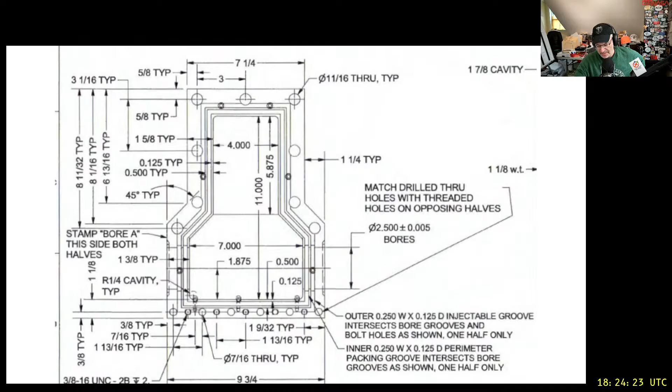Yeah, Bill only says, good thing I already took the Excedrin. Yeah, it's true. Evil says, professional engineer, not a professional draftsperson. Okay, so in the old days, I could say that now. In the old days, you did have drafts people, and you did have people whose job it was to make the drawings, and you had engineers whose job it was to make the designs, and they were not the same people. But what's happening now is that they tend to be the same people, and the industry wants them to be the same people because it costs less, they think.

So with our electronic tools now, you go in, think about Fusion, right? Let me show you some other examples before we jump into the argument about Fusion, which I think is a good one. The same thing happens in electronics. I'm just going to share with you some lovely electronics drawings. We'll take a look at these here. Here's a very good schematic. I couldn't find the one I wanted to show you, but this is an example of a very good schematic.

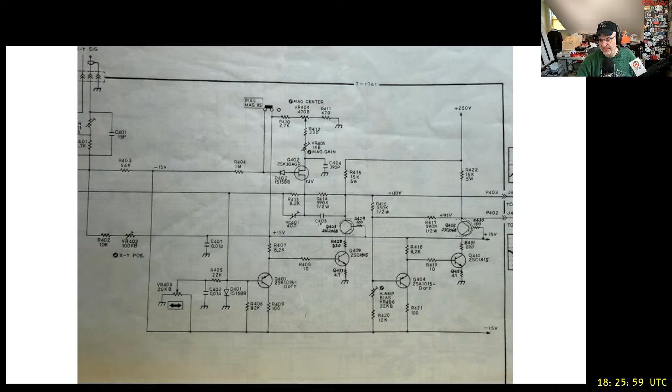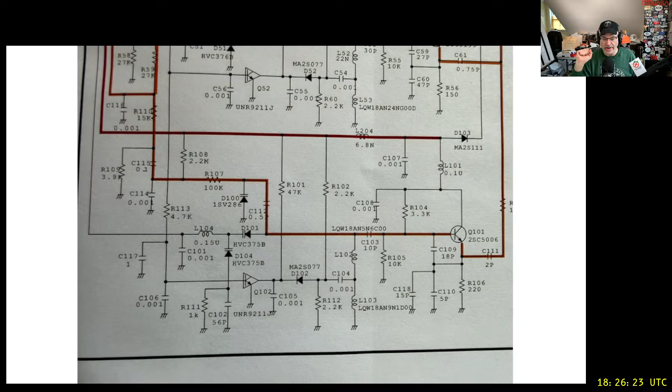It's very clean. The signal flow is left to right. Everything is done nicely. You can read and understand this schematic easily, almost trivially. There's a big view of the same. Here's another schematic. This came out of an ICOM radio. Again, note the use of color to show certain signal paths. Very clean ground symbols, so there's not excess wires all over the place. Very nice. So there are ways to do good schematics.

Here's another one. This is actually a big shot of part of the ICOM schematic, and it's very clean and it's easy to read, and you can follow the signal flow. I can tell you that the schematic that Mike showed me was not. So I started working on a drawing, and let's see if I could show you this drawing. Yeah, here it is. It's nothing crazy. It's the fill adapter that I've been working on. This is a work in progress. This is not finished. And this is page 1 of that drawing. Okay.

Mr. Tim Beatty says schematics are a directed acyclic graph. You're welcome. Thank you. I don't know if you know this, but Carl Tauber and I played bass for Directed Acyclic Graph back in, was it 79, Carl? I think it was back in 79.

So typically you're going to face off the part, and that's going to be 0, and then you work your way in. So I could stand at the machine and program this, or I could stand at a machine and turn this, and I have enough information to get the job done. This isn't finished, so this isn't presented for analysis, but that's what I like to do. So I like to have a main page and then a sub page, at least for each operation.

And then sometimes you have to have detail sections where you go in and show some details. For example, on this one, there's an O-ring groove. I think I can get the job done without a detail section on the O-ring groove, but we will take a look at that when we get to it.

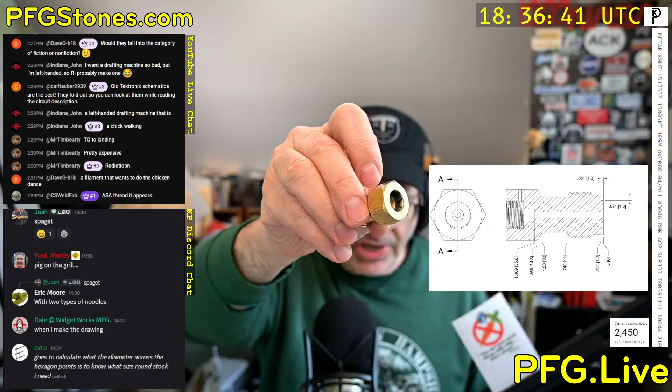CS Weldfab, you're very good, sir. He notes that there's a weird thread there. Yeah, so this part, which, by the way, here's the model for the part, right? I have one of these, and I'm reverse engineering it. Okay, full disclosure, this is a reverse engineering job, but we talked about this before, and I had to nail down the threads on this part.

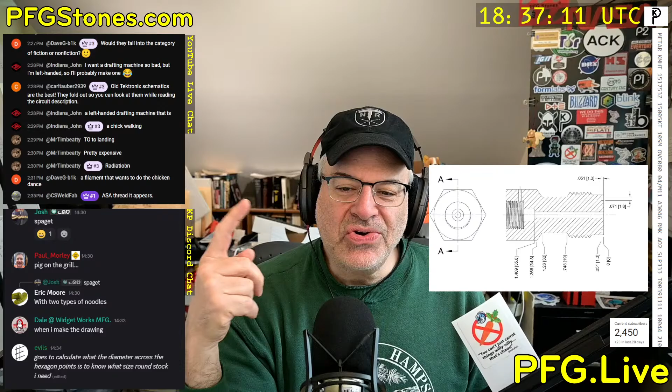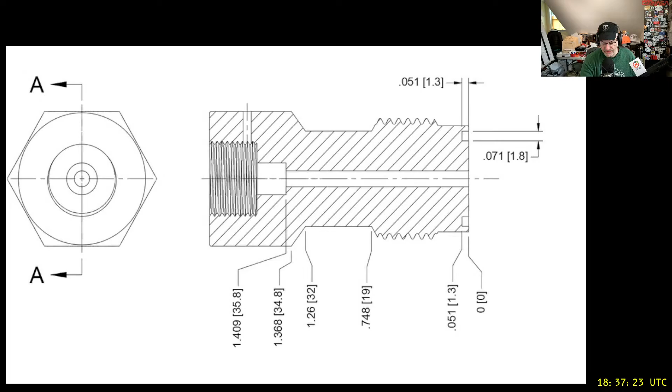So the small threads, the ID threads, turns out after a little sleuthing, was lovely M14 by 1 millimeter. So that's standard as standard comes. However, the OD threads that you see, the big fat threads, are meant to go into a scuba tank valve. And the O-ring, of course, is a seal on the face of that valve. So,

what is that thread? Well, I was hanging out on Discord while I was doing my research, and I was talking to Dale, and whoever was there. And this was not trivial at all. We were able to figure out that it was 14 threads per inch, but that's where the similarity stopped, because the outer diameter was weird. It was not obviously metric. It was not obviously imperial. And I was having a hard time figuring it out.

I think Dale guessed at a pipe thread. He said pipe thread, and I'm like, that is very possibly the path to the answer. CS Weldfab says it's a paintball standard. Yeah, I'm learning that. And this, of course, is for air pistols. And air pistols, paintball, it's all like one big happy family. Yeah, Dale says pipe sizes for the win. And it was a win.

So it's not yet on this drawing here, because I haven't finished it. But on the big drawing, I did note it, right? So here it is. G 5/8 by 14 BSPP. So from my understanding, the G is good luck. The 5/8 is 5/8 of an inch, which has nothing to do with the size of your threads. By 14 is 14 threads per inch. BSPP is British Standard Parallel Pipe. Did I get that right, Dale? So thank you very much.

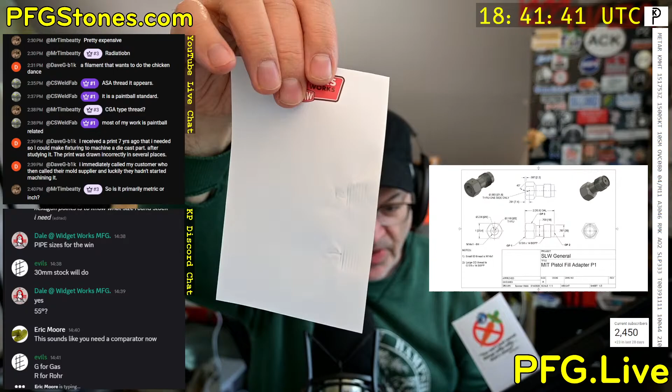Okay. Now, on the paper, you have focus. Thank you. You have the markings of the thread. And now you can count threads. You could make a little nomenclature right on the paper. And then you get out your calipers, my Mitutoyo calipers, and you measure them, and it will hit you in the face and say, yeah, dude, this is 14 threads per inch. So there's my comparator, and it works great.

And I'm sorry, John, if you get inundated with requests for comparator paper, but give it a part number.

And Eric says, but what about the crests and radii? So once we went looking, we found a table on the intertubes of British standard pipe threads, and sure enough, it listed the OD, the major diameter in millimeters, which, by the way, push a button and you're in millimeters land. That's easy. And I was able to identify it. I found it.

And Eric, you're not wrong. So the BSPP does have something to say about the crests and the radii, and I have thought about that. So we're getting there. And the CNC machine will help us with that. So evils says G stands for gas, and R is for Rohr. What is roar? Could you translate that for me, please?

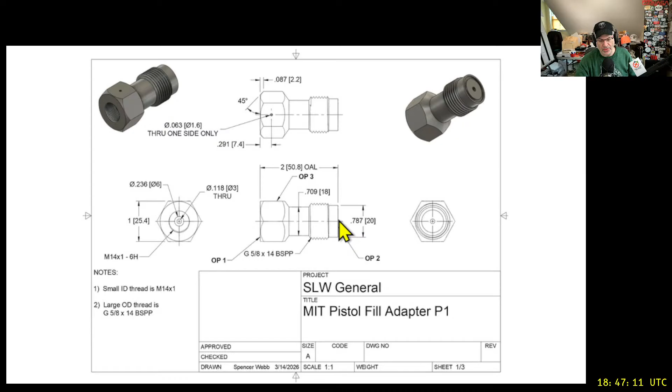And then finally, we stick a hole. It's a relief hole. Now this is going to have to be done in the mill. I think this is going to be done in the Bridgeport because it's not a big deal. But if you look, you'll see this little hole right here. And we really do have all the information we need on page 1. So I don't think that guy is going to need its own page, but I'm not averse to making it so. So we'll see what happens. I'm not averse to adding pages.

You should have as many pages as you need to eliminate the need for a guy to get out a pen when he is working on each of those ops. But not too many pages. And again, the litmus is if you can give it to the guy downstairs and he never has to take his pen out, that's 100% on the test.

The next thing is sign your work. Okay. Now, I know who drew mine, but sign your work. If you go back to our friend Pablo, he signed his work. How much do you think that artwork would cost?

I don't know the answer, but it's pretty impressive, the price to ink ratio in this case. So

There you go. The other thing that makes your drawings and your schematics a graphic novel is that they tell a story. So if you have dimensions on a drawing that are there for a specific reason, that are really important, call it out. Tell the guy at the machine who's making your part, who's programming your part, who's making it happen, hey, this is the critical surface in the whole thing.

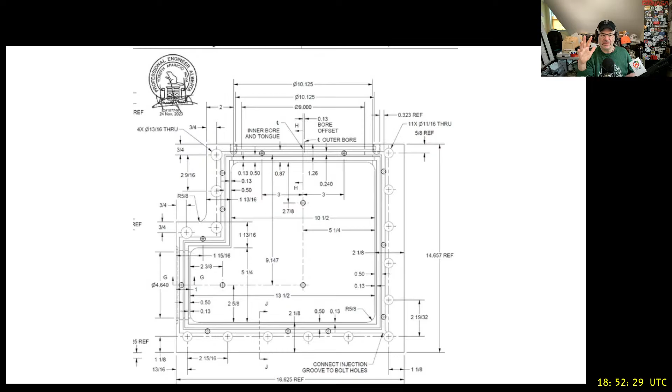So do you need to do that in your drawings? You might need to do some of it, or else your drawings are going to start looking like that. These guys could use some help. And I think this drawing is horrible. If and only if you're handing this to somebody to make these, which they were, this is going to give somebody a headache and more likely lead to errors than if we did what we said. Give the overview, give each operation its own subdrawing.

Eric says, my brain hurts. Yeah. Mr. Tim Beatty says, no datum, no bueno. You are not wrong. And Dave G says, I think with respect to the artwork, maybe a commentary on the whole world of artwork, more or less than a banana taped to a wall. Even that requires a little maintenance, so I don't think that's as simple as it could have been. Yeah, Dale confirms many errors have been made on those parts because of those drawings. And this is my commentary, sucking so bad.

So if your drawings are a graphic novel, they have a beginning, a middle, and an end. That would imply that not only does it give you the overview, give you each op's information so that you can make the thing, but also part of the drawing should be information on final acceptance measurements, if that's what it takes.

Yeah, so we have computers these days, right? So everybody forgets how to do drawings because it's not their primary thing. Many problem drawings come in from engineers, and this is both anecdotally and I've personally witnessed this, with dimensions to 4 decimal places, just everywhere.

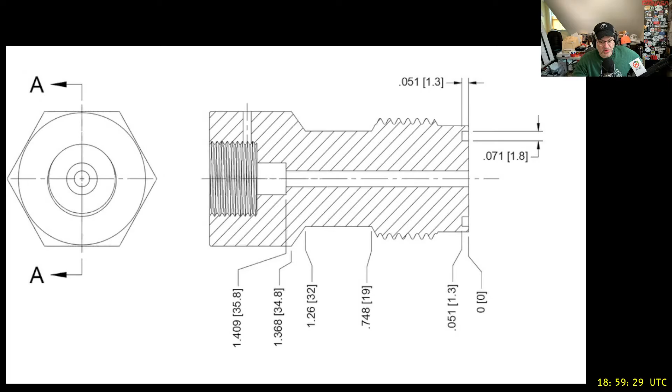Oh, Mr. Tim Beatty is yelling at me. He says you can't parenthetically have metric 25.4 millimeters with 0.001 inch with the same tolerance to decimal place. Mixing is confusing. Well, I would argue, sir, that the primary dimension is the dimension, and the other one is a commentary. Okay, so we're in America now. Speak Imperial. You're welcome, Union Carbide.

Okay, I know there are standards, and there are so very many of them. And as long as the drawing is clear and it meets the standards it has to meet, I'm happy.